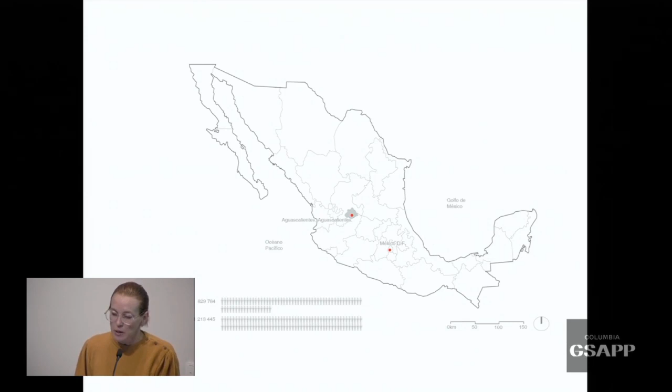And the project started almost probably 5 years ago. This is located in a city in the center of the country, in the state of Aguascalientes. The city has the same name, Aguascalientes. It's a relatively small city for Mexican standards, a bit bigger than 800,000 people. What is also kind of not standard from Mexico is that it's a city that is very well planned, and it's a city that has and enjoys a specific quality of life that is a little bit higher on average than that of Mexican cities. It's the capital of a small state, but a capital of a wealthy small state.

But it also shares the same problematics that probably all the cities in the world share: housing, how to house all the people there, and how to house them with a standard or good quality of life. This city is crossed by a power line that divides it when it touches the city, and currently the government decided to run that line underground, subterranean it, leaving a big part of the city with an opportunity to be built. This site basically has an impact that reaches 38% of the size of the city. So we were hired to do a master plan, as I said, 5 years ago.

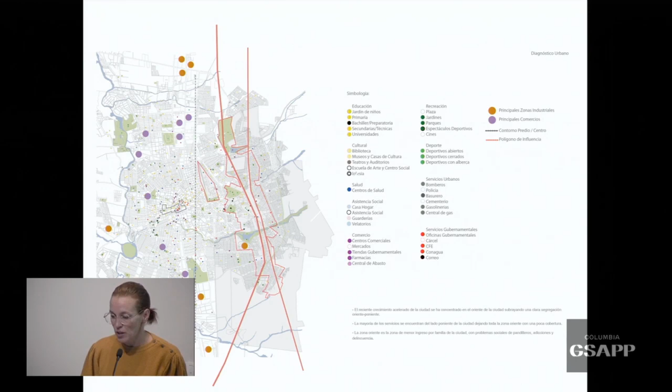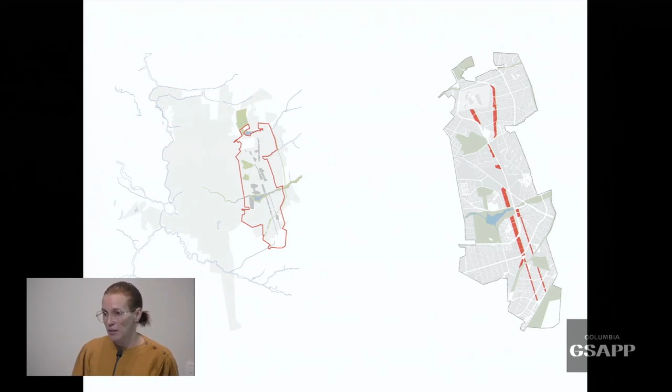We analyzed the whole city, as this is a project that impacts really the metropolitan area. And we understood the potentials of the site. It's very well located and very central to the city, and easily linkable in many ways, although it's a line that right now creates a scar in the city, empty, just with power lines running on top of it.

So we understood that we needed to break that limit that this line poses to the city tissue, and we needed to understand how to knit that together in order to provide housing, densified housing, and mixed program, and to try to keep the expansion of the city to the west, to the inner part of the city.

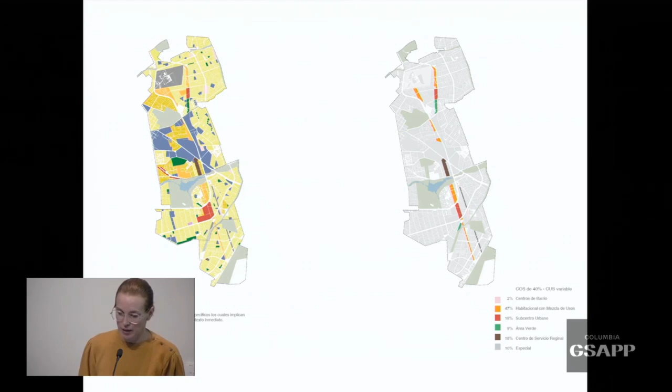A very big master plan was done that included the whole area. We call it Programa Parcial, a special plan of land use and direction for the whole zone. Then we proposed a master plan for exactly those sites that were going to be liberated by the removal of the power lines.

We wanted to create a strategy that, with the existing green spaces, would link this area easily, pedestrianly but also vehicularly, to the center of the city, and this way try to erase that scar that the line really imposes right now.

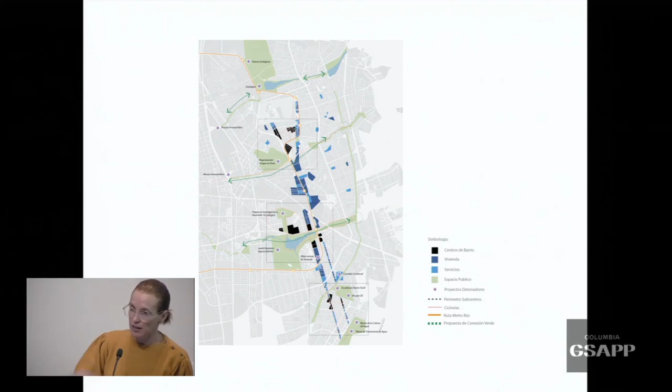We proposed a master plan that included several mixed uses, trying to fulfill the uses that were lacking in each sector. We divided the plan into 4 sectors and worked by sectors, understanding the specific characteristics of each one, and proposed specific programs for each of them.

And then after 3 years of work, the government changed. The governor elected was from a different party, and normally in Mexico this means the projects are dead, that's it, end of it. But fortunately, the governor that arrived then saw a big opportunity and wanted to retake the project.

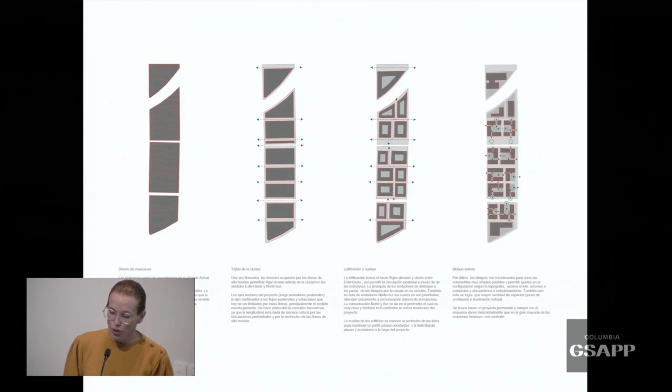So he asked us to continue developing the master plan, which was at a schematic moment, and at the same time to develop 2 blocks. We saw it as an incredible opportunity to first develop the 2 blocks and then inform the master plan back. Since the master plan had no rush, we thought it was important to hold it back and think how the design of those 2 blocks could inform the master plan.

So what to do? Invite 6 architects from different parts of the world. We went to the site, and the government decided which of the 2 blocks needed to be developed. One, the north one, was going to be developed by the housing department of the government of the state, and the south one by Infonavit, the bank that subsidizes and funds housing in Mexico.

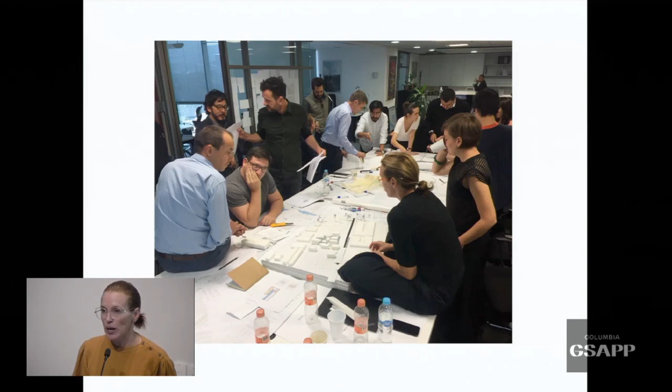So we brought all these architects to Mexico City for 3 days. We started with first workshops at the table, without first going to the site, understanding what could be a collective idea for a proposal for these 2 plots. We put a lot of ideas on the table, and then we all went to the site together.

We discussed the possibilities, the intense relationship this site has to the neighbors, and the difficult relationship that this poses. We started sketching and understanding what could happen there, discussing for several hours.

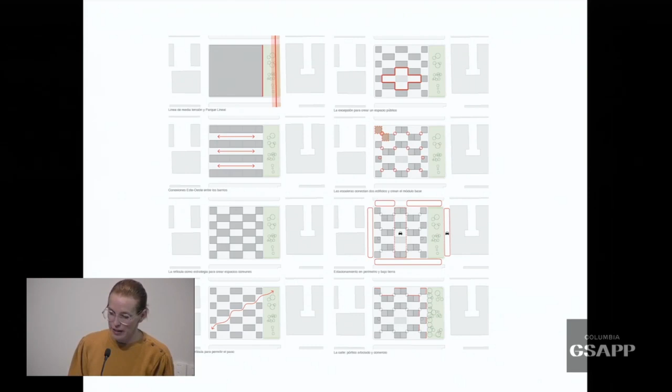And at the end, after these 3 days, we ended up with general smaller master plans for each of the blocks. The North Block, developed by Archilab, architects Macias Peredo, and Work AC; and the South Block, developed by MOS, MAIO, HHF, Derek Dellekamp, Dogma, and ourselves.

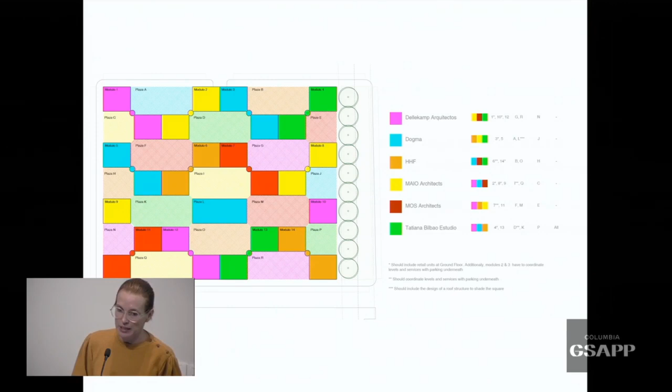This way, we decided how to create a collective designed by everybody, with specific buildings designed by each of the offices. Then each of us went away and worked on our own buildings. We decided to do a checkerboard that would allow those combinations of individual projects to come together.

Then we started discussing again what public ground would give this place cohesion, a collective idea. We started proposing plazas and collective areas, understanding this could become a platform of equal materiality but with richness of program, literally a platform for those living units designed by different architects, but combined and interposed within each other.

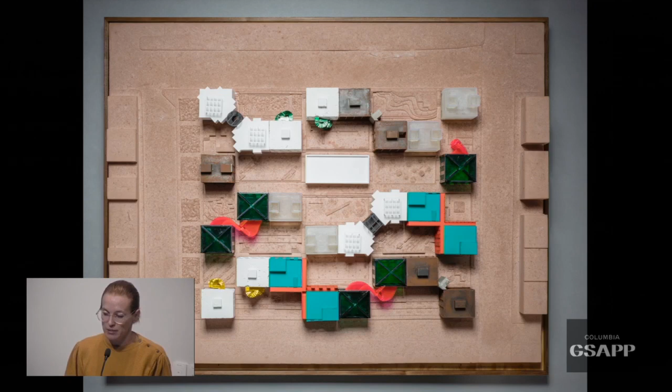And this is how we arrived at the final design. It's already done — construction documents were delivered this past week.

I think that the diversity of those designs really allows for people to identify or to be in conflict with the place, as much as be in this collective space that will reunite all of them together.

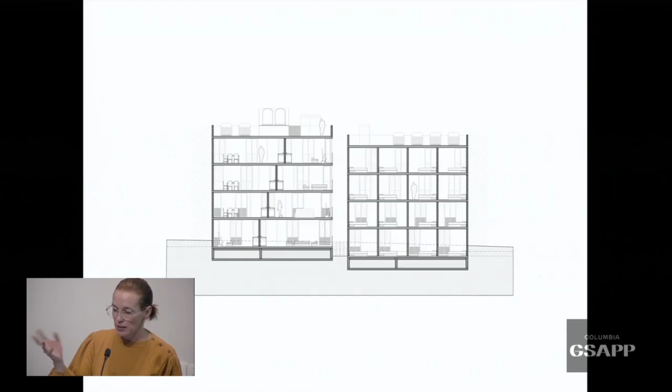What we did, quickly, the strategy of our buildings was to understand that we had to build 4 typologies, 4 sizes of units. We decided to use those 4 units and interpose them on different floors to create this idea of progression that the stair would lead you through. A little bit of a trick to understand how, within the regularity we needed to achieve for cost reasons, we could also create a singularity for each apartment. So a slight difference with a big possibility of encouraging better living in this place. Thank you very much.

I'm going to quickly share a small number of projects that have to do with two things: a much larger collective effort, where many of my colleagues here have been involved, and also the Centro de Investigaciones de Infonavit, who has had an incredible number of initiatives that united us around these projects. Also the earthquake that happened a little over a year ago, which, while tragic, has also been a major catalyst to bring architects together on issues of social housing and public space. So two years ago, this research center of Infonavit, led by Carlos Zedillo and Julia, who's here with us, did this project called Del Territorio al Habitante.

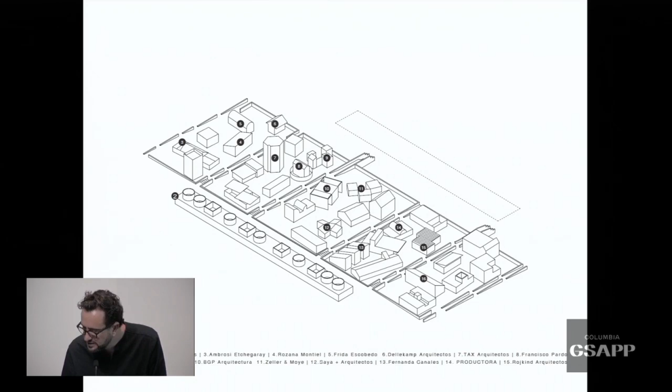Later, Infonavit commissioned MOS, Hilary and Michael to do a master plan to build 30 of these houses in a place called Apan. This is just a quick image of their master plan, where the upper building is the main building with services, and then the 30 prototype houses. This was about 3 weeks ago, so these houses are almost finished, and there should be an opening in a few weeks. I'm sure Julia will talk about that.

Later they held a competition for a lower lot here that was like the missing piece of the master plan. The program for this building is a laboratory for materials, which reinforces the idea of this experiment, or museum, of different housing prototypes. We entered the competition and won with this proposal.

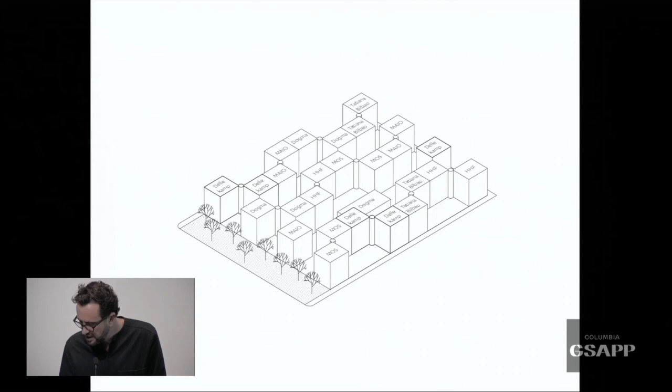And this is the other major project that brings us all together, this group of colleagues, the one that Tatiana just explained, and that we will talk about further in the discussion.

I can't give an exact number, but there were many houses in rural areas that had to be abandoned, either collapsed or with major damages. In the days after the earthquake, through WhatsApp, a number of architects built this platform called Reconstruir Mexico. Tatiana was a big part of it, Carlos Zedillo was a big part of it, and in just a few days we had almost 150 participants. The energy in it was really incredible. They formed a number of groups to structure this effort, and everyone in their own offices was doing the immediate things they could help with.

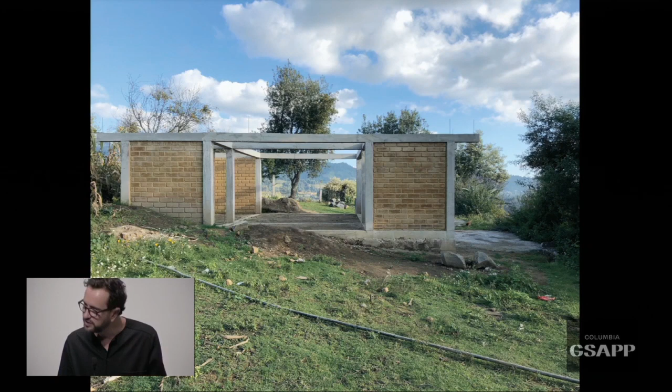Many of these communities have incredible limitations, not only in the type of materials you can access, but also with specialized hand labor. So case by case, you have to work with that community and figure out what makes sense, what's the right thing to do with each specific case.

So these are just quick images. In this case, for example, these earth bricks are part of the materials you could get in this specific community. Salvador, this is a moving story.

Then this turned into a workshop in a university for other houses to be built. We also did funding for many of these houses. So we really integrated ourselves into this effort in a broader way that had not just to do with designing specifically. These are other communities where we designed.

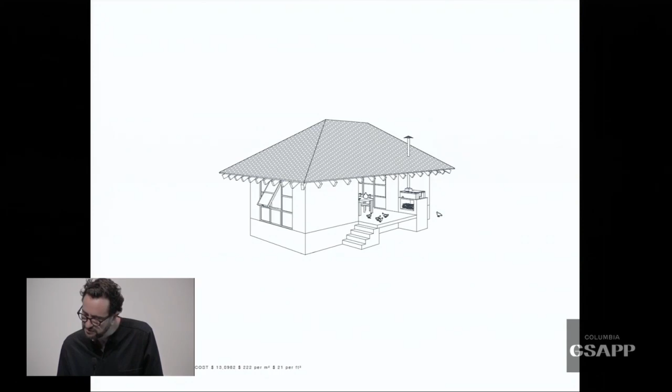Again, this is a project led by Infonavit, in this case in this Oaxaca community area that is really, really poor.

Finally, this project, or how this housing effort, led us to later design public space that is related to or interwoven with this social housing and collective effort.

This is Jojutla, again another project led by Infonavit. What was special in Jojutla is it was one of these places that was really mediatic because of how much of the public space had been damaged. So in this case, Infonavit focused more on rebuilding public space than housing space. There's a number of different projects here.

This is a small bridge that's been commissioned to OMA. There's Alberto Kalach doing a school, and we are doing two different projects with a really close friend, Camilo Restrepo—a church, which is right here, and a community center, which is up there.

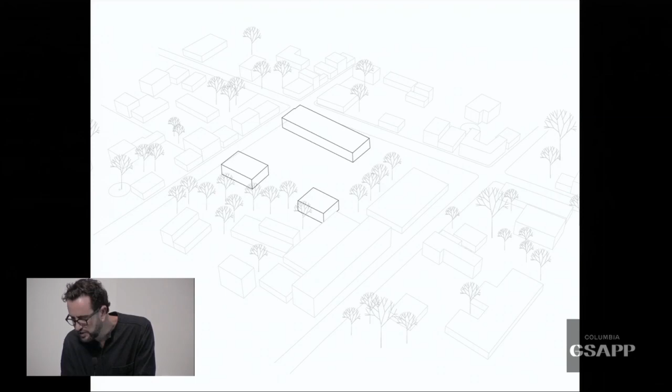Very quickly, this is the park. The park had a community center which was really damaged to the point where it had to be demolished, which was right here. So we took that as an opportunity to open the space, get rid of that building up there, and open the space to make it public and really integrate it into the neighborhood.

And what it is, is a really simple portico typology that has to do with a grid in the park. This is meant for really simple things, like having an ATM, having a tortilla place, and just really simple community services. And finally, this church, also designed with Camilo, had to do with the previous church falling.

So this was the late 18th century church of Jojutla, and this was a church that was built in the year 2000. So this one collapsed, and this one was damaged to the point that they had to bring it down.

In this case, Jojutla is an incredible place in terms of its climate and also its vegetation. So we were immediately inspired by Felix Candela in his open chapel in Cuernavaca, which is just a few miles away from that.

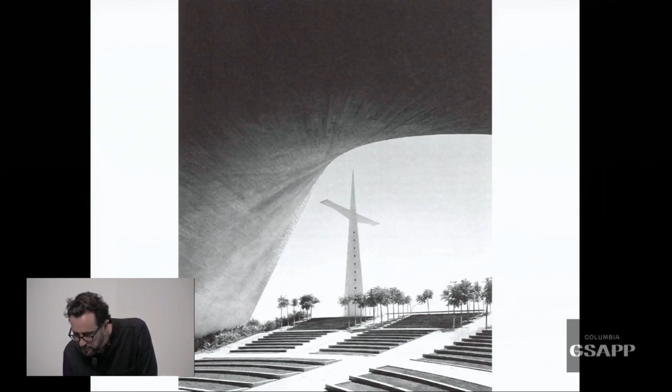So again, this is an open chapel that has to do with public space, and what we felt was really moving in this case is the psychological impact that these spaces have after an event like an earthquake. Thank you.

I was nowhere when the earthquake hit. I'm Swiss, and I think I'm an example of doubt - the doubt if you do social housing in Mexico as a Swiss. I would be happy if this is also addressed today.

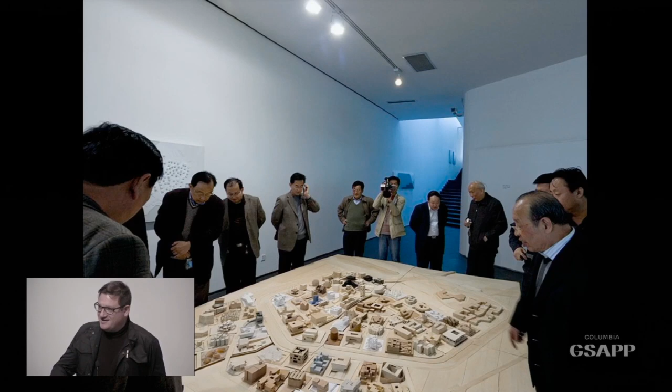That made us think of another project we did in China, Ordos 100, for those who know it, where we had to compete in a situation where 100 different people design a house. We were brought back to ourselves and did the most simple way to construct spaces, with the kind of stupid joke of the roof being our HHF sign, for Google Earth reasons.

So we had this guy coming from Brazil who said, I want to have a house, I'm a fan of yours. We said, okay, we cannot really deliver. I think this is the question here: what can you deliver as an architect in a situation so far away?

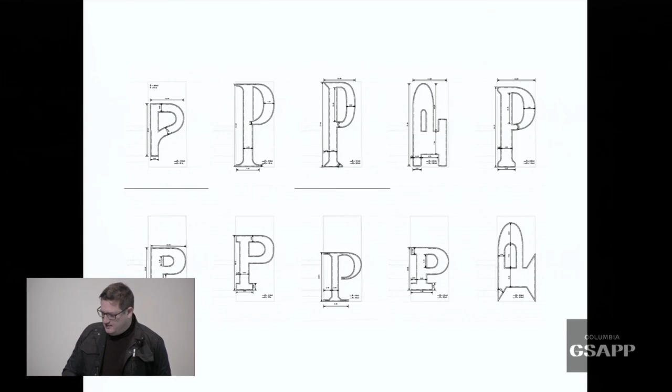We said one can make a good house out of anything. Your name is Pat, and your plot has the size that we can fit a Series P on it. That's what I mean - this is quickly done if you want. Of course it's more complicated than you think in the beginning, but this is using the most common way of building and giving it something special.

These are renders. He then did that with his friends there and sent us photographs of the construction process, and now it's there - it's built.

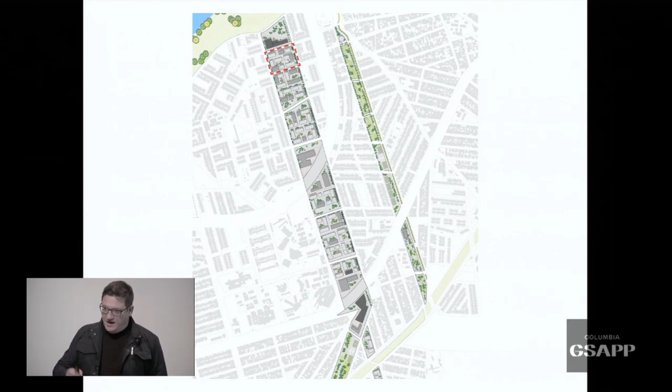So that was the background we had when we were attacking the question of how to respond to Tatiana's question, or the question of that site. I don't have to repeat the master plan, but I didn't know if Tatiana would even make it, so I put these images in.

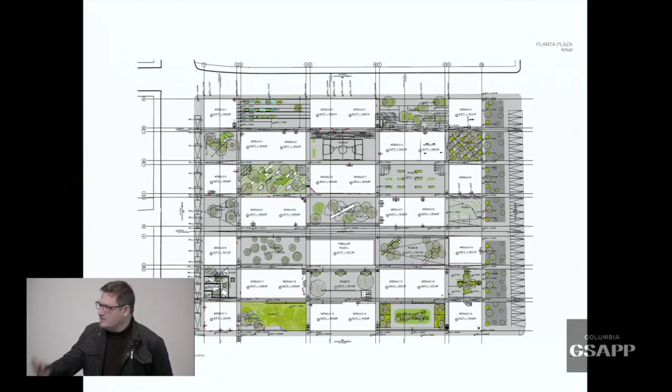So this is the site. It's a difficult site, with neighborhoods next to it that are quite introverted, but we all agreed when we saw it, this can be a real neighborhood. It's not about emergency housing - it's just about how to build a part of the city.

That's why we were happy about the idea of just doing one building and then informing the master plan, rather than doing a long master plan with everything set and then applying it. So we knew it would end up as something like this wild mix.

We looked at other examples, did research, and asked the question: what can we do? The question is clear - you can almost not spend money, but you also can't just do the most banal building, because otherwise you'd have to renounce the job of being an architect from Switzerland. If it's just about following the local rule, then we just spent miles in the plane and money for nothing.

So we said, what we can do is - someone picked us for a reason, we maybe don't know why, but we can do the job like we do our jobs. Maybe that's part of the diversity of how people attack a question, and that can be the benefit for the project.

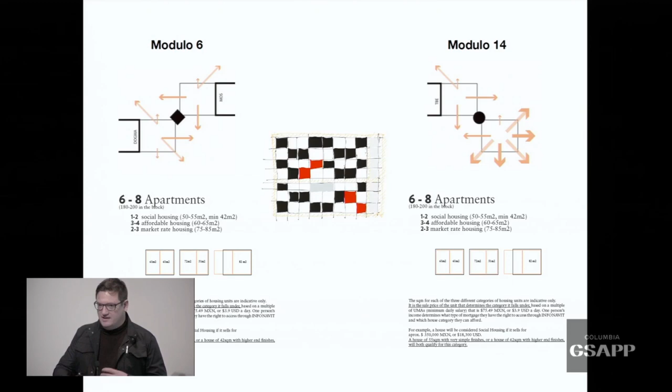We got a brief with the square meters, and a brief with the question of how to fit that on the plan. You see that's our plots. Even though the checkerboard is very uniform, it creates a big variety of spaces - because here one plot is missing, so this one has a different condition than there, and this one is totally at the edge.

So we wanted to reflect that in our floor plan for the project. Then we had the second thing, which is that this whole operation is on a slope, which leads to half-height differences.

So we thought maybe we can combine simple houses, combine the entrances to have one expressive moment, like an element which is a big common stair, which is also a social space, and we try to do something with that.

We saw, when we drove by on the bus, that there's something like a tradition for bigger steel operations on the site, which I think has to do with the car industry there. So we said we can do something special with the floor plan. The basic idea is we don't want to have any technical shafts, so on each floor, instead of investing in technical equipment, we wanted to have just all natural ventilation.

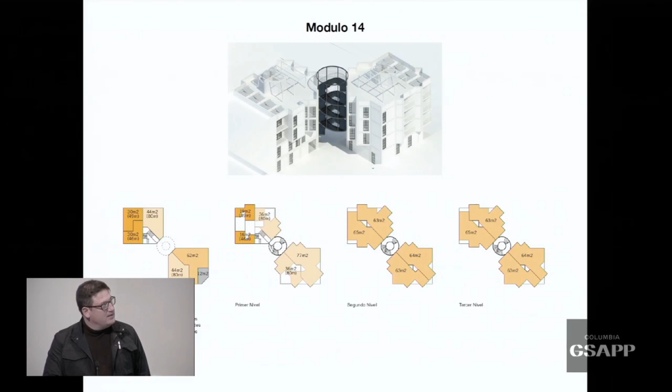Now I'll just go through the floor plans and the elements. So this is the program with the smaller housing units in the lower parts, and then the question of how to get these light situations we want.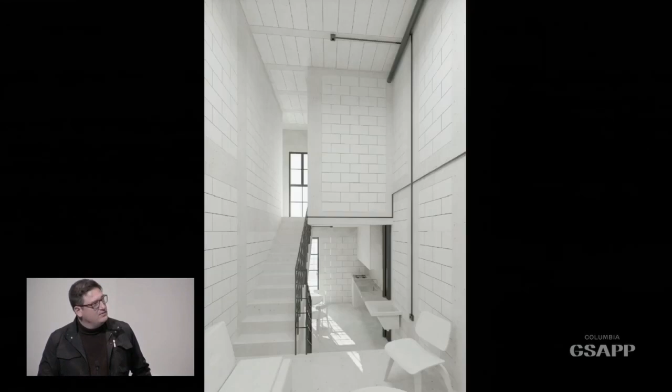The most simple way, this is a house which is just next to the site. So here also, the views and searching for the views in the sun was the main issue. So this is then how these two buildings operate as a whole. Thank you.

Hello everyone, I'm Anna Puigjaner, speaking on behalf of MAIO, an office based in Barcelona. It has been an extraordinary project for all of us. It was a great opportunity to work collectively, but not only that, to design collectively. And the result that we're presenting today, it's quite obvious how this work has influenced the project itself, so you cannot detach the built form from the urban form and vice versa. That's a real consequence of this going back and forth from offices to collective discussions and so on.

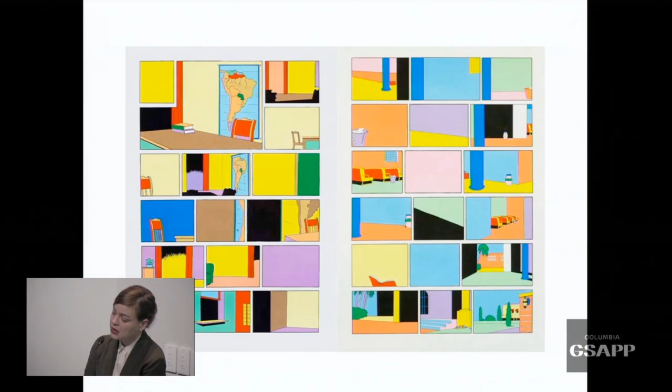Tatiana was mentioning that. So our project for Territorio de Gigantes is an evolution of research on housing typology that we have had at the office for a long time now, and it's research specifically on how to abstract domesticity.

A certain level of abstraction allowed any story to happen within the same format, and for us it was really attractive, how to allow this abstraction and translate that into the domestic. So we started claiming in the office that what we need is actually generic rooms or abstract rooms, spaces that are not predetermined with a domestic program, but allow any domestic program to happen.

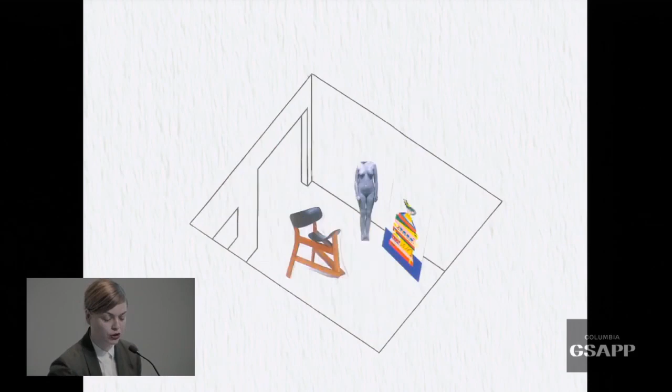At that time, it was specifically a reaction to how housing was being built in Spain, where most of our housing stock is defined by and addressed to just one social type, what we could properly call the family type, based on a structure of mother, father, one or two children. We were aware that our society in Spain is much wider, more than 70% of our society doesn't respond to that social type, so we were claiming to start designing houses that could answer to this wider social reality.

Alongside that reference of abstraction, I've been researching kitchenless houses worldwide, specifically here in New York. At the turn of the 19th century, there was a large volume of apartments that lacked kitchens, and apart from that, the apartments were able to expand and decrease. So suddenly the house was understood as a system where parts could be added and subtracted on demand. That allows us to reflect on the need to also have a diffuse limit of the house itself—why should our houses always have the same surface, and therefore the same type of space?

Our social needs and life needs change so much through our lifetime. So how do we understand our social needs and start proposing houses that can be adaptable to that, in terms of surface? We start to talk about the idea of a diffuse house, a house that can be defined depending on our needs in terms of spaces and rooms, and therefore whose limits are not clear and predetermined. So we're claiming to have not predetermined program houses, but also not predetermined limited surface houses.

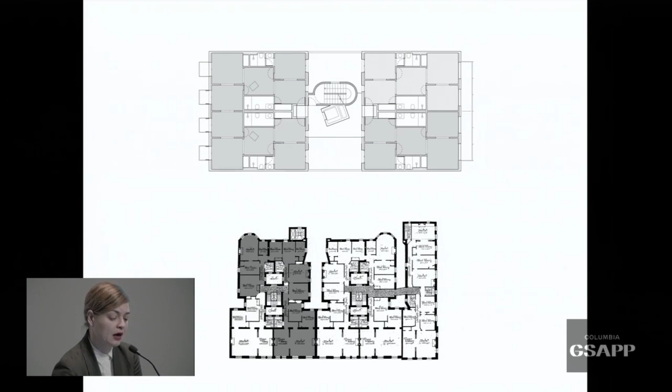The first attempt to put these ideas into practice was in a housing block we built in Barcelona years ago, where the building had 110 rooms that could be combined to form different types of apartments. At the same time, each room was not predetermined in program, so even the kitchen could be placed in any room.

At that time, we started working with the idea of big doors, also to raise, in an even stronger manner, the ambiguity of the limit of the room itself. So suddenly, it's a kind of simple trick, but a big door allows you to connect two rooms. It's really simple, but at the same time it provides a lot of richness in terms of apartment uses.

I'm quoting all this because for us, the Territorio de Gigantes project has been an evolution of this typology. This is our proposal for Aguascalientes, where every apartment has 6 spaces, as generic as possible, and the program is not predetermined.

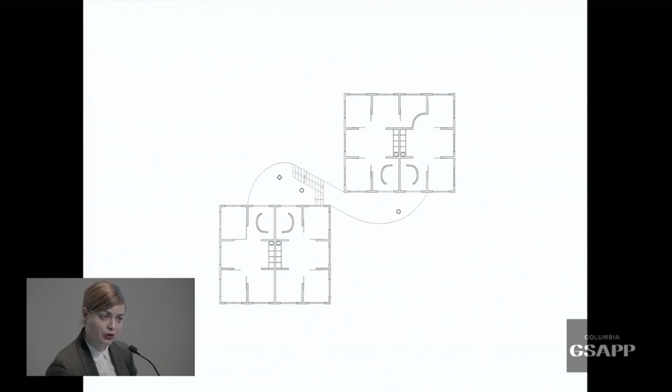And the doors, we kept the idea of using big doors, but we made a really simple move. If in the Barcelona housing block we built the doors in the middle of the room, here the doors are just in the corners, allowing a larger possible flexibility of combining the spaces. So all those rooms are subtracted and added in order to allow different combinations.

At the same time, we started to work with the idea of the mistake and the error to raise specificity in a generic system. And we learned that with a project defined by a grid, by a strict order, and suddenly that order was producing these kinds of mistakes and outer spaces when encountering a pre-existing limit. And suddenly we realized that thanks to those situations, the order exists.

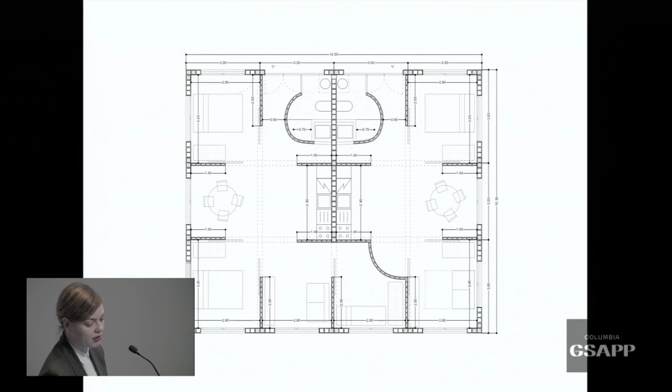So we also started valuing the idea of the mistake as something that, despite a generic set of generic spaces, allows you to raise certain types of specificity. So in Aguascalientes, we have this kind of mistakes that allow it to be specific while at the same time generic.

The structure is really simple, trying to make it as economical as possible. And on the rooftop, we talked a lot, also with the rest of the teams, about how to raise collectivity, not only in the urban plan but also in our buildings. So in the rooftop, there are just 2 simple walls that divide the rooftop into 4 spaces, and our aim is to invite appropriation of that rooftop.

So in Mexico, if you have a wall, suddenly you're going to have something built on it. So accepting the idea of appropriation and growth through time, through little glimpses. For us, these walls, we know they're probably going to be fenced and appropriated in the future, and for us it's accepting the nature of the place itself.

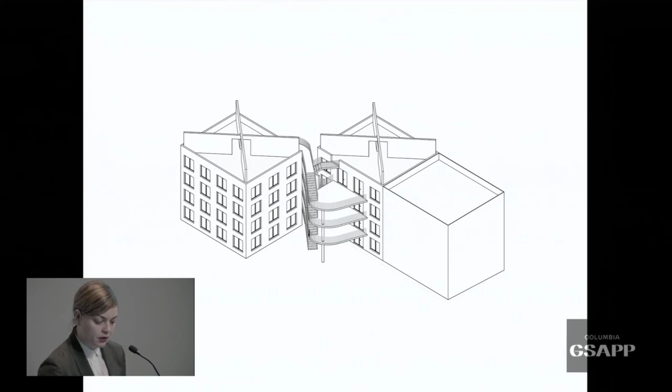Instead of designing a simple stair, what we did was expand it to the point that it's ambiguous, in a sense that it's too big to be just a stair, but not adequate to be a proper private terrace. So this kind of odd device, for us, is an architectural apparatus that forces discussion and dialogue among neighbors. In order to fence it and appropriate it for yourself, you have to discuss with your neighbor and achieve an agreement among neighbors.

That's why the forms themselves, if you look at them, each building has its own form. For us, it's an experiment. It's something we really liked from Infonavit, that they were all the time encouraging us to push the boundaries and propose new typologies, testing those typologies for future social housing typologies. So we thought, let's try different forms in different buildings, as a laboratory to understand how different neighbors can occupy those odd forms.

So we have forms ranging from really simple ones to extremely big ones. For us, those terraces are definitely a place in between the most private and the most public, a space that allows connecting the domestic to the urban and expanding domesticity into the urban space. Thank you very much.

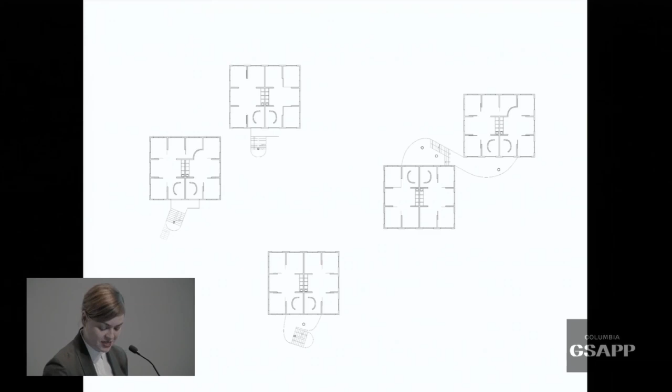I thought it would be good to have a general discussion about the process of working together, and to talk more carefully about collaboration in the context of your offices and thinking through the problem of housing. So that's one point.

Maybe three things we could touch on. First, a synopsis of collaborating, what that means in each of your practices, since all of us to varying degrees have experience with that, in the context of housing. As architects, we're often collaborating with colleagues and consultants, but we should also look at the community as a collaborator, interfacing with them at different levels.

I'd also like to talk about issues around public space, since this came up in almost everyone's presentation. I often reference an essay by Lina Bo Bardi, where she writes about houses and museums, questioning and claiming that houses are not just houses, and that thinking about housing has to include amenities. She doesn't use that word, but the idea of what else informs housing on a cultural level, that you can't just build housing without that component.

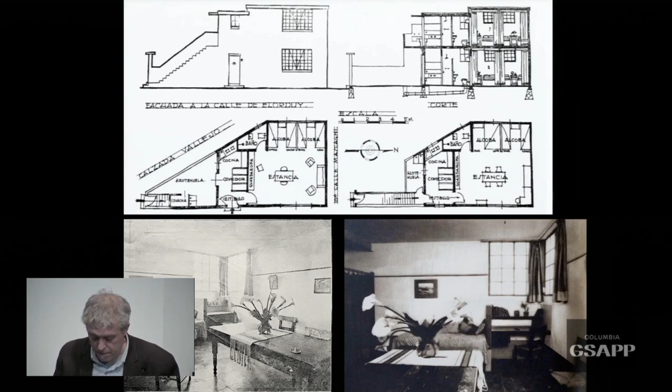The 1932 100-unit communities that he designed in La Vaquita or El Balbuena follow these ideas and prototypes, except he developed units for work or for retail, with gates that could open up for production or selling of commodities. He also developed units with a double-height interior space, again to avoid the oppressive sense of environment from these very small and tight contained units.

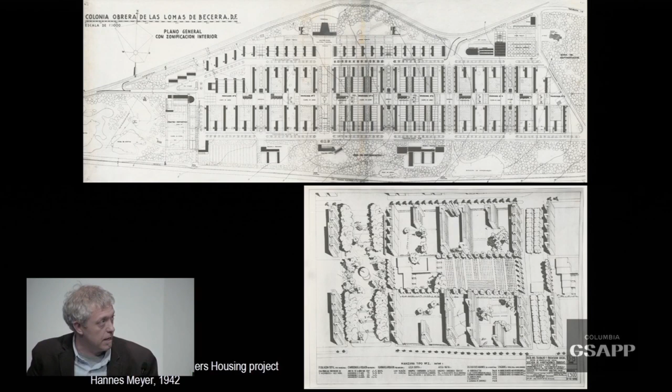Now, with its standardized unit, which is repeated into a slab, and the slab that then becomes determinant of the city, the second case I want to address is the Siedlungen model, which was most effectively introduced into Mexico by the emigre architect and ex-director of the Bauhaus, Hannes Meyer. This is a proposal for a large workers' housing project that was never built, but the Mexican architects who worked with him in the Department of Working Class Housing would transform this model of the traditional Siedlung bar into something different, a component of a new type of model for housing, which was also composed of a slab, but a very different slab.

And this slab would try to account for different family types and income types, and you can begin to see this in particular in the way that the section begins to work out. It also, in trying to transform this model, they were trying to avoid the monotony that could be characteristic of the Siedlung model.

Not only in the domestic scale, that of the apartment, but also ultimately of the whole urban planning as well. So Mario Pani, most famously in his Multifamiliares, took from this model plan a series of examples. I want to point out that Pani was, in fact, one of the architects who worked on this project. So specifically, what we see in these various examples of the units is a mixture of units that in some cases spanned multiple floors.

So the unit, you enter into one space and you go up or down, which meant there was a skip-stop elevator system, which is what we see in the Centro Urbano Miguel Alemán. There were also different relationships between the interior of the unit and exterior spaces or courtyards, both in plan and section, which allowed for this porosity of the surface, creating different types of balconies and, most importantly, gathering zones where people could meet and be together, which is something we saw happening in the Miguel Alemán housing project.

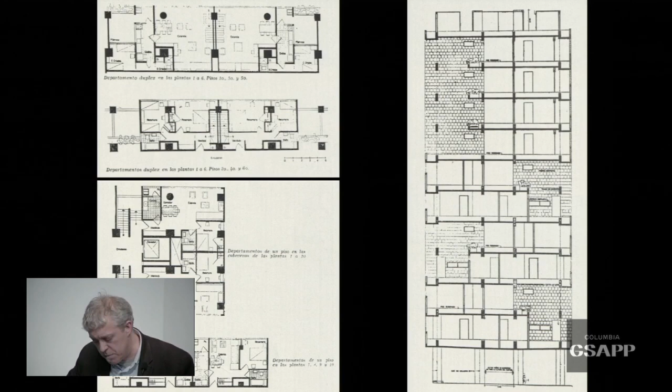Now, what these two previous cases lacked was an integration with the landscape and an acknowledgement of vernacular and cultural traditions.

Architects like Juan O'Gorman, who started off as a functionalist in the late 1920s and early 1930s, began exploring the cave house as a dwelling, and as a place to explore art and muralism, to create this total work of art. O'Gorman is most well known for his mosaics for the Library of the National University, which he did following this experiment.

So the cave house for O'Gorman, from 1949, was really a type of personal manifesto, something that seemed unique and irreproducible. Now, interested in creating an architecture that, quote, 'was not based on forms antithetical to humans,' the architect Carlos Lazo also explored the morphology of the cave.

Here you see some of his early study drawings from the late 1940s or early 1950s, thinking about the way that cave morphology could create a new type of architectural space - a type of telluric architecture, one that seemed to grow out of the ground, out of the place. What Lazo wanted, and he would eventually become the Minister of Communications and Public Works, was an economic, efficient, and hygienic architecture.

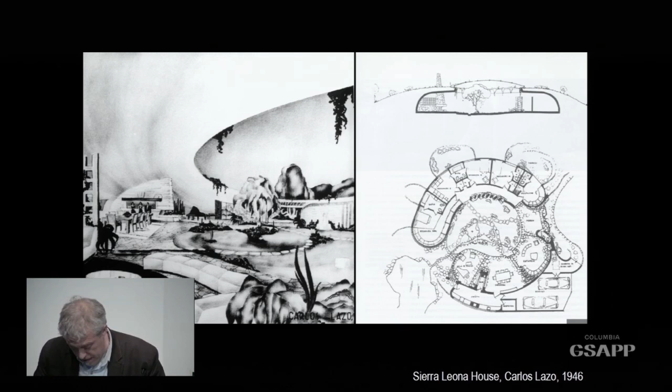And then, of course, he was very interested in new forms of construction. Instead of creating an additive construction, he started thinking about a subtractive construction, which was not only cheaper to make but also created an economic living environment because the earth itself provided its insulation. So the idea of the single cave house became the idea of a landscape housing.

This is something he actually built as director of Communications and Public Works, in an area on the outskirts of Mexico City called Belén de las Flores. It was a housing project of what he called civilized caves. So in Belén de las Flores, what Lazo did was create this very large community that seemed to solve, or wanted to solve, the problem of inhabitation in Mexico.

So the community was this very large community on the side of the hill that could possibly become a model for different places throughout Mexico. He has maybe about 30 different prototypes in his archives that he was experimenting with, and this Lazo is standing right there, just to give you a sense. So this community would have the integration of traditionally designed modern furniture that was actually built by a subsidiary of the Ministry of Communications and Public Works. The units were all completely different and had the most modern of services.

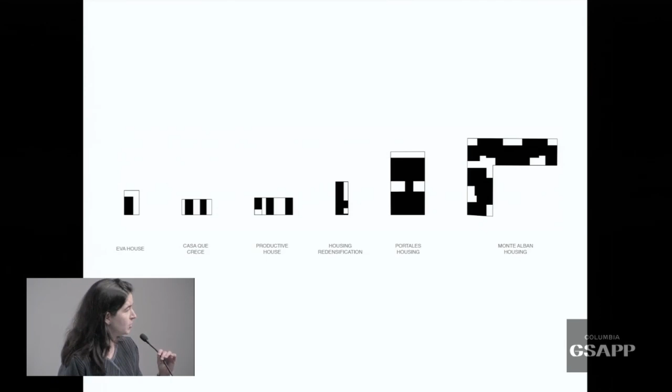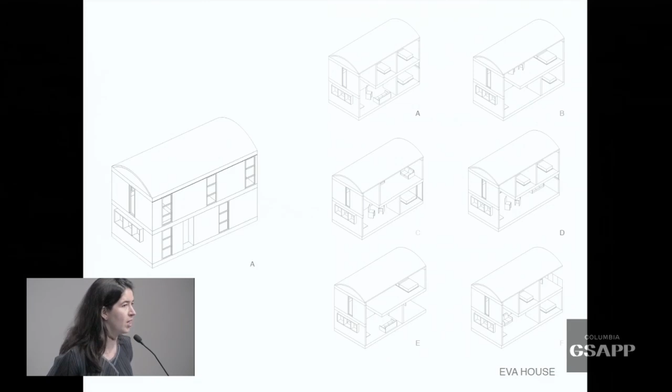4 of the first projects are commissioned by the CIDS, the Centro de Investigación of Infonavit, the research center, promoted by Carlos Zedillo and led also by Julia, who will speak later today. The projects range from very small scale to larger, from rural to urban, and from specific to more generic interventions. The first one, Eva House, a house built for a family left with no house after the 2017 earthquakes. It's the same model that Derek presented for a community in Ocuilan, a 2-hour drive from Mexico City - a house that has to cost around $8,000 and be built in 2 months. We're just about to finish it.

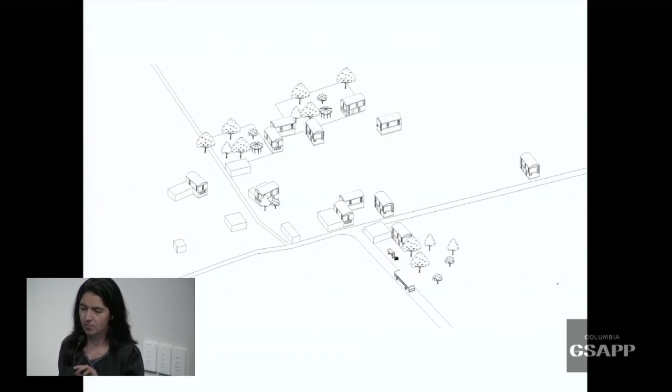The idea was to provide Eva a house with 3 bedrooms. She used to live, as many people in the same area, with the whole family in a single-room house where they cooked, slept, even had different partners or children from different parents. So the idea was first to provide individual bedrooms - prototype A with 3 bedrooms and a double height area for communal space for cooking, living and dining, with different solutions replicating the same structure, the same frame, with 1 bedroom as working space or even a terrace or open patio. This is the solution being built, with a water deposit just above the bathroom - very economic, simple - but also thinking how this same prototype can be replicated and multiplied into a community, built with self-built production. We're building the bricks, earth bricks, and we're almost finished.

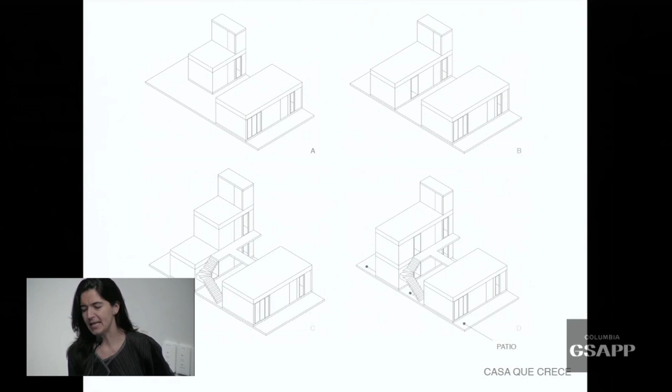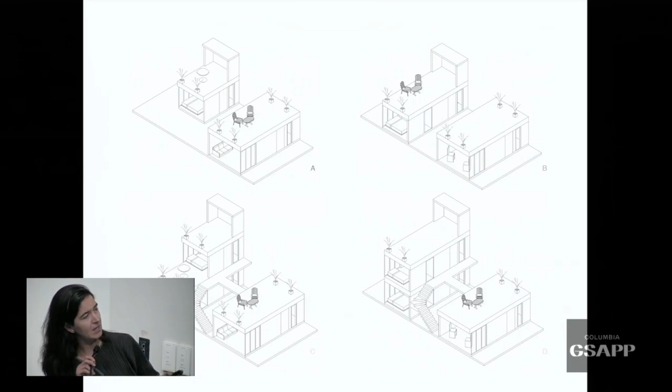This second project deals with the same idea of how a very single unit can grow - a house that grows with the family's needs. The first prototype A has just a single bedroom, with the living and cooking area separate from the house, playing with the separation of the 2 units and providing a patio or different ways to grow at the rooftop. This is the ground level with the basic unit, also providing 2 or 3 bedrooms for the grandmother or a newlywed daughter or other family needs, and working space or storage for crops. Then you can shift volumes and provide patios, because most families are used to cooking outside, or having the bathroom outside. So it's different typologies, the same structure.

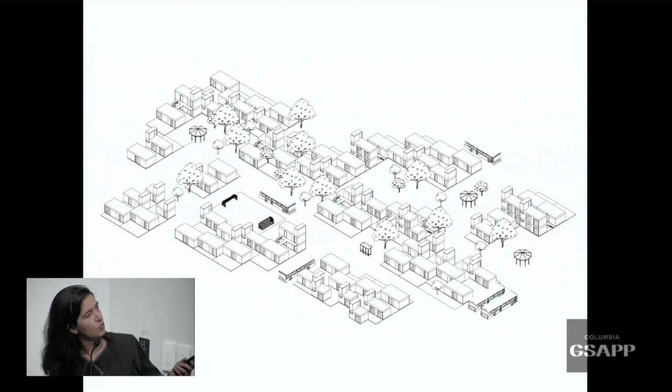And it's also thought to be self-built with different materials.

This third project, the Casa Productiva, depends on a very basic unit of 25 square meters, providing a growing house that can change typology, with different solutions for 1 bedroom, 2 bedrooms, and working space. You can have a tapanco, a double-height space, which has to do with reusing rainwater, with the bathroom and kitchen directly below the water deposit.

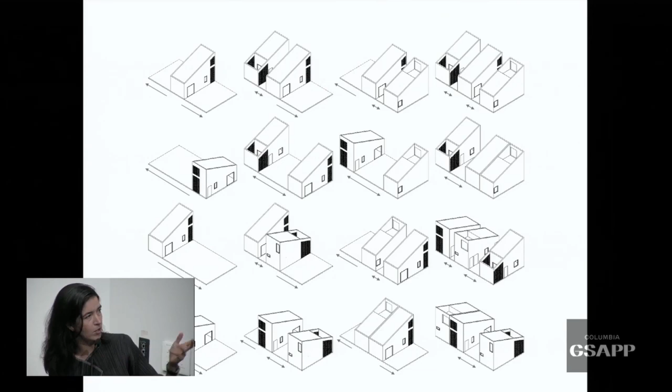It's also thought to be built with different materials, ranging from adobe to block or even hay, forming a community as well. This project is being built now, with 2 prototypes in Apan—the same project that Derek also showed. We're almost finishing the houses.

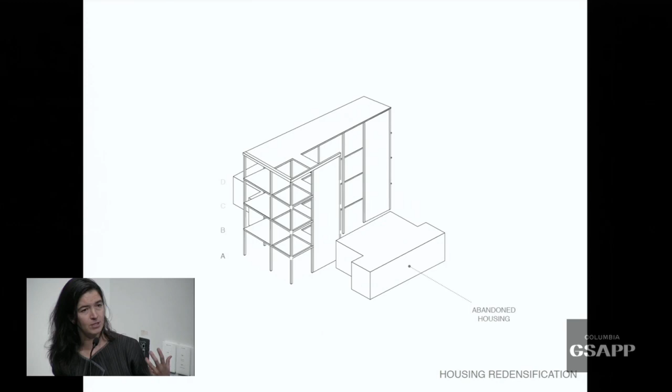This 4th project is thought of with the same concepts as the 3rd project, but with the logic of redensification, taking abandoned housing and providing the same idea of houses that can grow, even within a vertical solution. So you have minimum housing with the possibility of growing, extending a new room, or even copying and mirroring the apartment building, using the vertical circulation and services, like the stairs, to provide a more economic situation.

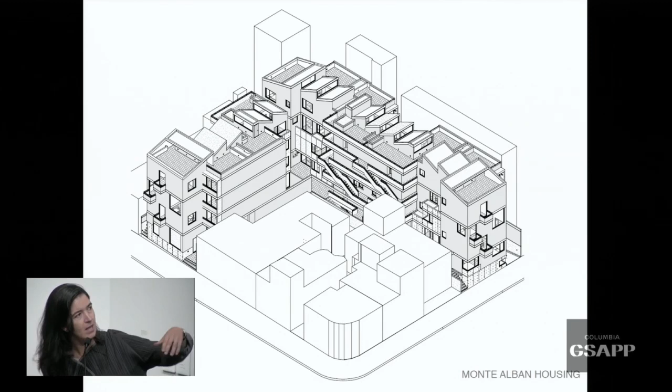This project is Monte Alban Housing. We're about to finish it this spring. It's 24 apartments, also with commercial space extending to the street. It's a very long volume, but it opens up with different patios and balconies. The idea is to provide different typologies, ranging from 50 square meters with 3 bedrooms up to solutions with just 1 bedroom or working spaces. So you have the diversity.

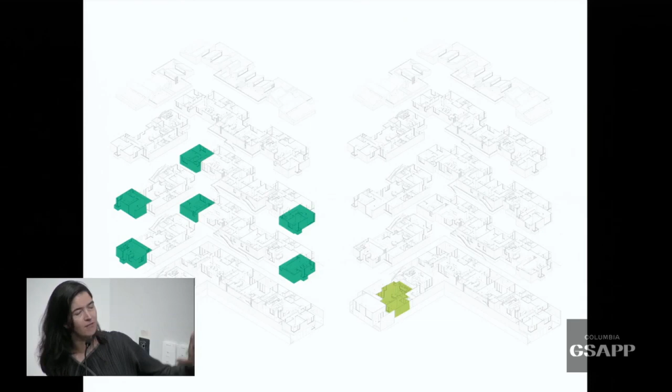In a way, I think all of these projects connect with the same idea of providing diversity within a unitary structure. So you have 1 bedroom, you have commerce, and you always have patios or balconies to extend the dwellings. This is the solution—you also have the rooftops and double-height duplex housing in the upper floors.

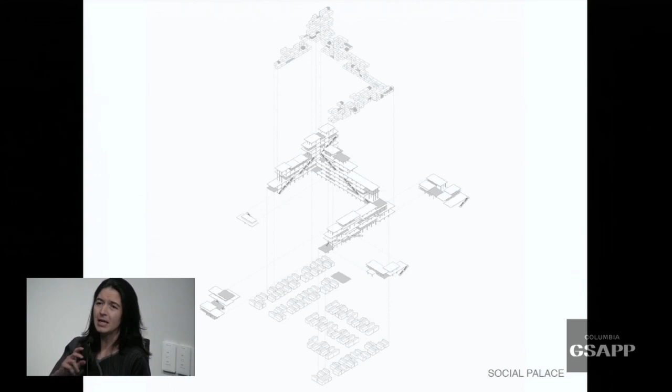This is the 7th project. It's a utopian proposal dealing with a problem in Mexico: we have more than 5 million abandoned houses. Mexico is one of the countries with the most scarcity of housing, but it's also one of the places with the most abandoned housing. They're mostly new housing built in the peripheries, 3 or 4 hours away from working areas or schools.

With no links to public transport and no services, the idea of this project is to take the abandoned houses and build structures on top of them to provide all of the lacking services—working spaces, recreational areas, and links to public transport.

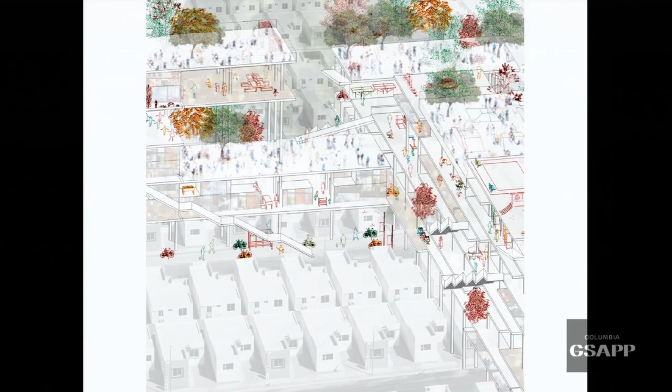In the past 30 years, the population in Mexico City has grown 40%, but the territorial expansion has been more than 260%. So we're growing just to sell more, extend more, buy more, but it's not actually related to the needs, not even to population growth. So we have millions of abandoned houses, and there's a proposal for what to do with those areas instead of just continuing to grow and extend horizontally—providing the existing structures with something else.

This last project, I think, in a way relates to Luis Carranza's idea of the more organic house, or landscape housing. It's a single family dwelling, but the idea of the client was to invite—it's a weekend house 2 hours from Mexico City. The client always wanted to have guests, so it's a house for more than 2 or 3 families at a time, with private space but also shared common areas.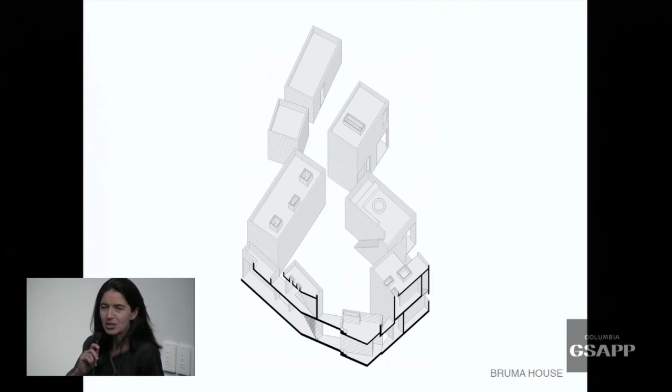So in a way, I think it relates—even though it's a completely different budget and size—to the first projects, in the sense that you have a single dwelling that can be multiplied and then have a communal space in the center. So you have 9 different volumes comprising different areas, like either large bedrooms or small houses just put together around the central courtyard.

And you have a house that in a way deals with these different gradients between public, semi-public, private, or completely private. They open up to different views, depending as well, like the first projects, on climate issues and orientation.

So you have the different volumes, and how can you sum up the different private needs, or think about the consequences of private needs in a collective territory or in a common land. So, thank you very much.

Hello, thank you Hilary for organizing the symposium, and Adam for the presentation. As an architectural firm based in Mexico City, when we think about housing, we think in urban environments. We don't understand housing as something to be in rural areas. We are used to understanding housing in these urban environments.

Mexico has a great heritage about housing. We have great examples from the 20th century that were projects guided by architects and institutions, in a kind of collaboration that worked really well for a lot of years. After that, we have some more serious projects that were not guided by architects but more by political decisions and economic interests. I don't want to talk about this specifically, but what we want to address here is that housing as a typology is one of the richest representations of the history of cultural evolution in a city.

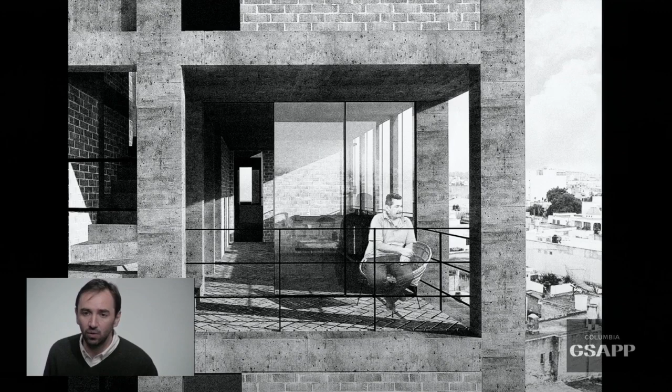Domesticity could also be a way to understand rituals, rituals as simple as standing in a portico watching toward the streets. There are a lot of typologies in Mexico that have to do with this idea. So this idea of domesticity is also a tradition, and it's something that could not just be erased. It has to be preserved, or at least given the opportunity to have a continuity or a transformation during the process of time.

So to work with these possibilities to create different kinds of domesticity, we think the exploration of different typologies in architecture is very important for us, because through them we can search for different ways to give the new housing the opportunity to express this different kind of domesticity. That exploration of typology gives us the opportunity to rethink or redefine concepts as simple as how to solve an apartment building on a corner of two main streets.

But it also gives us the chance to explore the idea of the patio house and how it could be transformed into an apartment building. Or how to reinterpret the idea of the classical tenement housing building that is very popular in some neighborhoods in Mexico City, and how that could also become a new housing building, trying to preserve this idea of the tenement housing.

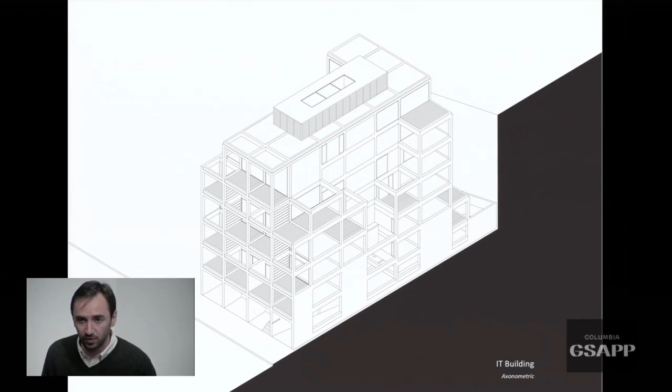And also explore ideas on how a grid could offer different possibilities of inhabiting, with completely different sizes and configurations of apartments, but always trying to explore this idea of the grid also as a typology. And also the idea of the portico, again like a typology, the house with a portico that is very common in some rural areas in Mexico City, and how that portico could become a building like itself, a building with porticos.

Apart from these explorations of typology, the other concept we normally focus on in the development of this project is this idea of integrity. When we talk about integrity, we normally talk about structural simplicity and economy of means, because it starts approaching the topic of ethics in our case.

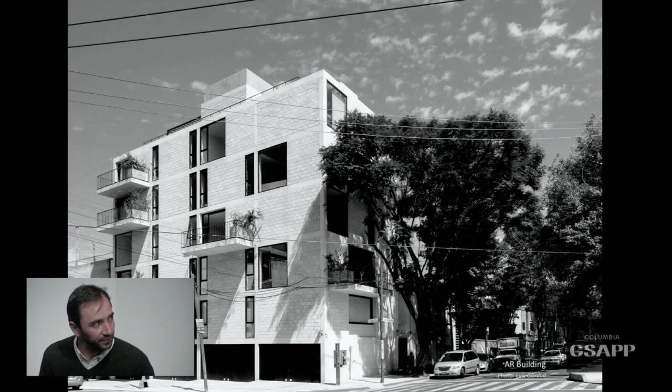What we think is that when we try to build something in Mexico City, the most complicated thing—Derek already explained the problem we have with earthquakes—is that any construction in Mexico City already has an overcost, because of all the effort we need to put into structures to resist earthquakes. So normally structures have to be simple, because the structure by itself is already too expensive to be affordable in houses. So we cannot explore or invent things in structural terms, because what we want is to keep the cost of the structure as low as possible.

So what we believe in this idea of integrity is how the structure could become part of the facade, and how every element you put on your building works in a structural way. It's not just a way of designing facades, but everything working together. In this case, the grid of columns is combined with shear walls that are working and taking the efforts for the earthquake. So all the elements in this kind of facade work precisely to resist earthquakes and support the building.

Or maybe also talking about integrity, understanding the void that forms not just the patio in these patio houses, but also the void inside the house, and how these two voids relate. So the integrity of the building becomes both the interior and exterior space, like one complete space that just flows from inside to outside.

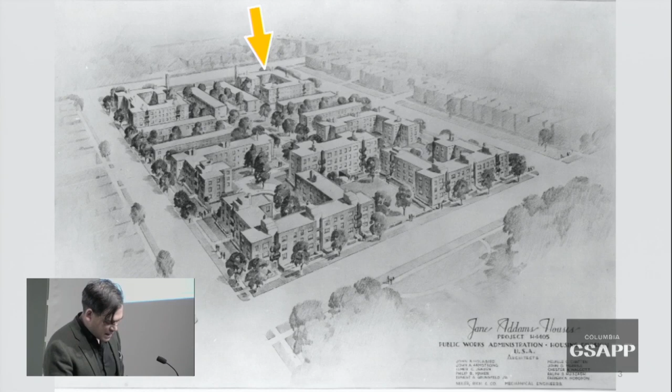Unfortunately, Lisa Yun Lee, who's the executive director of the Public Housing Museum, the National Public Housing Museum in Chicago, is unable to join us. The blizzard got in the way of her flight from Chicago this morning. When the National Public Housing Museum opens in the last remaining building of the Jane Addams houses, it will be the first cultural institution dedicated to interpreting the American experience in public housing.

So I am just going to very briefly cycle through her slides in her absence, just to make sure, if it's not already, that the National Public Housing Museum is on your radar and that you visit them the next time you're in Chicago. One of the things that Lisa, in our conversations leading up to today, really emphasized...

...was not only the physical site in the Jane Addams houses that is sort of a repository of memory, but also the deep outreach and public programming the museum has done with constituents, both current and former, of public housing in the Chicago area. This I thought was particularly poignant in light of the Lafayette Park example. Really doing deep outreach to lift up not only the physical environments in which public housing has taken place, but also the personal stories. And I think storytelling and the role of lifting up the narratives of users is going to be central to any expansion of our conversation about what housing environments and other kinds of complex environments can be.

So I'm really grateful to have the opportunity to introduce some of those questions into today's conversation, starting with David Brody, who's going to talk to us a little bit about hotels, labor, and how those can influence how we evaluate these things. David?

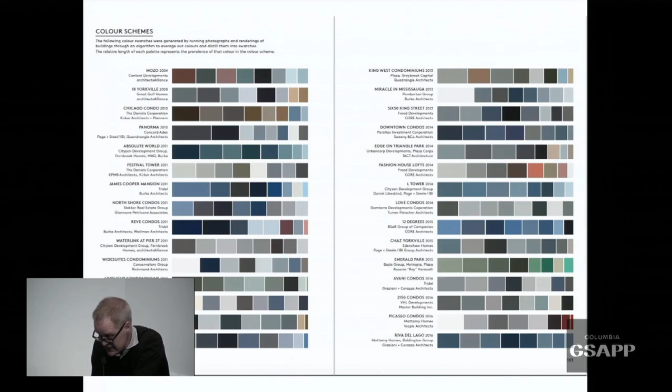This overall sameness is visible, for instance, in the exterior colors of the buildings, which range from dark gray to light gray and from greenish gray to grayish green. We analyzed this, and here you see a selection of buildings, and you can see that the most adventurous designers of condo towers use a little bit of red and a little bit of green, and that's about it. It's just one example of the sameness and blandness of these buildings.

In this respect, speaking here on a day which is dealing with new paradigms, and in a panel which is about design excellence, I think I'm slightly out of place.

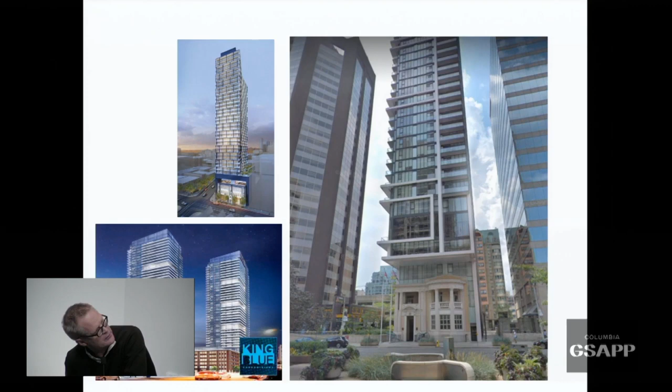What is striking as well for me is that those buildings, those condo towers, are completely interchangeable. They display an amazing indifference to their site and their context, to the city and its history. Even if they try to include existing architecture, they do it in a way which is only a Potemkin version of history, according to me.

The architecture is underwhelmingly present. It falls between the cracks of the spreadsheet at the beginning and the branding strategy at the end, which speaks about everything but architecture.

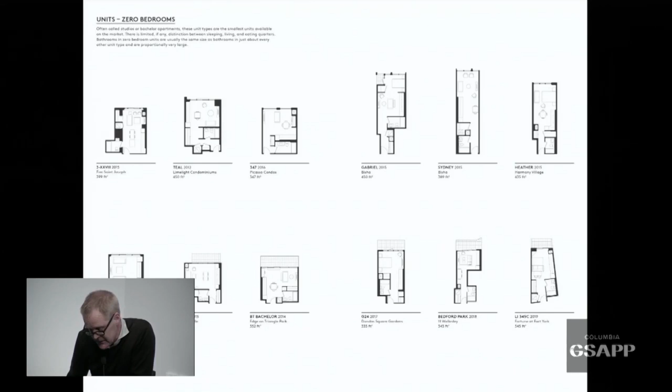Here you see how this sameness is also reflected in floor plans, which are extremely small. In the light of this morning's discussion about Mexico, the price of one square meter in Toronto is similar to a whole unit in Mexico. And the amount of inventiveness in one square meter in Mexico, I think, is the same as the whole unit here. So we just made a selection of floor plans and put them all together.

I'm moving forward to maybe my favorite part, this so-called one bedroom plus den. A den is, in most condo towers, a room without a window, which is often used and rented out as a second bedroom. Here you see why some of the small units have two bathrooms to allow for this renting out. There is obviously a legal difference between condos and apartments, but this is hard to maintain in Toronto, where somewhere between 25 and 40% of all privately owned units are actually rented out.

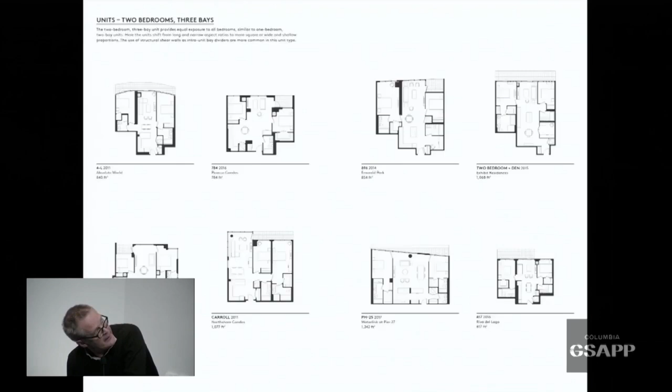The best category I kept for the end is the leftovers in every single building, and these are my favorites by far. In the light of a tradition of 50 years of housing design studio here at this school, I think nobody would get a high pass for anything like this.

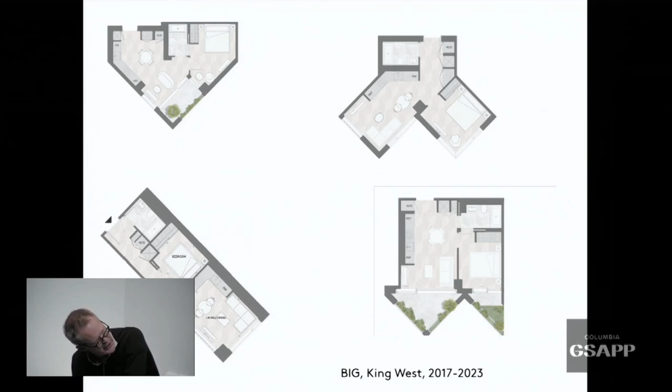I have a European background and I don't want to be Eurocentric, but it's striking that some of the best projects so far, maybe the real exceptions, and of recent date, are designed by European, in this case Danish, architects. You can see this project is on its way, and the same for two projects by 3XN, which I believe stand out as much better than the average in Toronto.

They are invited because there is an obsession with design excellence, even though it's almost absent in those condo towers. There is an obsession with branding, and Danish architects work for this idea of branding, and the same is true for Karl Lagerfeld. This is a particular case where an existing design for a condo tower has gotten a bit of touches of genius from Karl Lagerfeld, who was asked to design the lobby and one model suite.

As you can see here, these are the lobbies. The most important thing was maybe not so much his design, but his presence at the party, which was really like a big event with great slogans as well. This one is great for someone who's always dressed in black.

Here we see the master himself in this model suite, which he transformed from a cramped unit into a cramped unit with black and white details, which is somewhere like 10 feet wide, and as you can see, at least 10 feet high, which is part of the narrative of branding, that you have floor-to-ceiling luxury if you have anything that's 10 feet high.

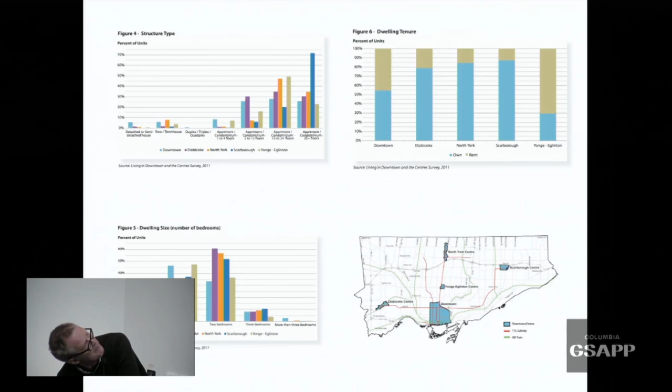There's the arrival of large chain stores which you used to find in suburban malls, but are now present in the city as well. So it hints at a suburbanization of the center of Toronto.

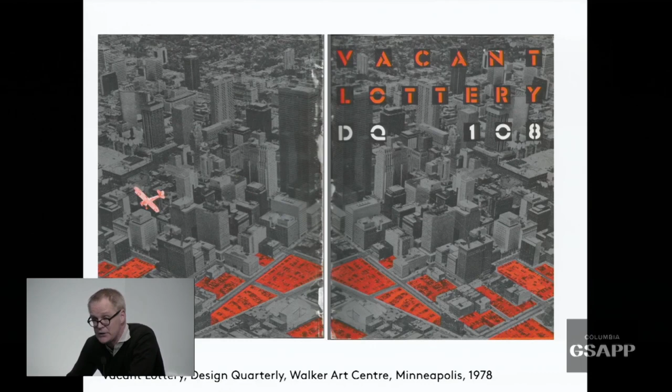Two names connect to this development in a very oblique way: George Baird and Jane Jacobs. Architect and educator George Baird was one of the makers of Vacant Lottery, a special issue of the Design Quarterly of the Walker Art Center, in which he analyzed, together with Jack Diamond and Barton Myers, the presence of all those vacant lots in the center of Toronto and the possibility to transform them.

This is a drawing from that special issue, which is a bit ambiguous. It was meant to show that you could turn a high-rise into a dense low-rise project, but I think one way of reading it is also to see it the other way around, as a kind of argument for what happened actually in Toronto recently.

The other person who should be mentioned is Jane Jacobs, who left New York City to continue her work in Toronto in the late 1960s. She has an enormous reputation in Toronto still today. She's somehow the patron saint of pedestrian urbanism. In Toronto, they've invented the Jane's Walk, one year after she died. You don't have to be Roman Catholic to see the procession-like character of those Jane's Walks.

She's often invoked in Toronto whenever a designer wants to prove they've done something well by saying that she would have approved it, usually about walkability, neighborhoods and whatnot. But as a firm believer in free markets, I think developers could also claim that what they are doing is something that Jane would have approved of.